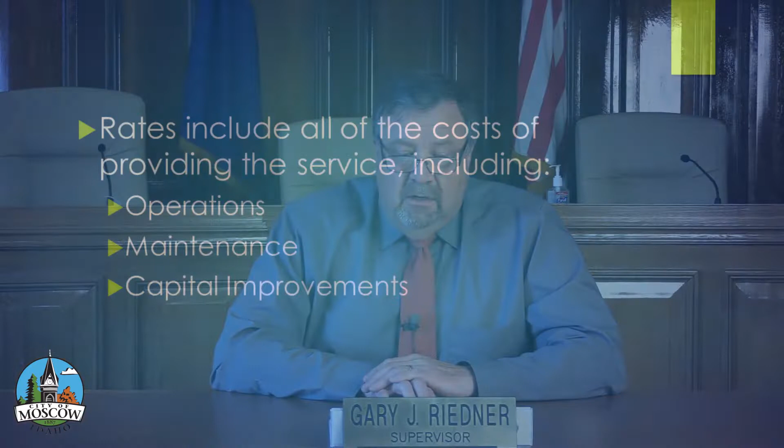Utility services are a little different because they aren't paid for with taxes, they're paid for with rates. So if you're a customer of the utility, you get water service, sewer service, garbage service, you pay a fee for that just as you would to a private vendor. Our Idaho code dictates that rates for these utilities must be equivalent to the value of services that are provided to the public or the customers. And rates include all of the costs of providing the service, including operations, maintenance, and capital improvements, or in other words, capital costs.

Typically, rates are broken down into two components. Base rates, which are rates which are identical to other customers in the same class, that is to say residential versus business, which may further be broken down for businesses determined by the type of business that is the customer. And then the second component of rates is what we call consumption. Consumption is calculated on the actual use of the commodity or the service by the individual customer. Balance of the two rates helps us to have a healthy mix of consistent funds for operations of the utility, while also allocating costs as much as practicable to those customers who are using more of the system.

Rate studies serve several purposes. First, they require that rates be revisited every 5 to 6 years in order to make sure that they are fair and equitable, including revisiting those customer classifications which I just spoke about. Secondly, they act as a check on the system to determine that operations and capital plans are up to date and funded appropriately. And lastly, they allow citizens to participate in the rate setting process.

The current rate study has been underway for many months, and during that time there have been updates to operations and capital plans, but there have also been questions regarding customer classifications, particularly in the areas of restaurant base rates and mixed uses, or separate types of businesses, typically in older buildings which are served by the same water meter, and how those mixed use rates are structured.

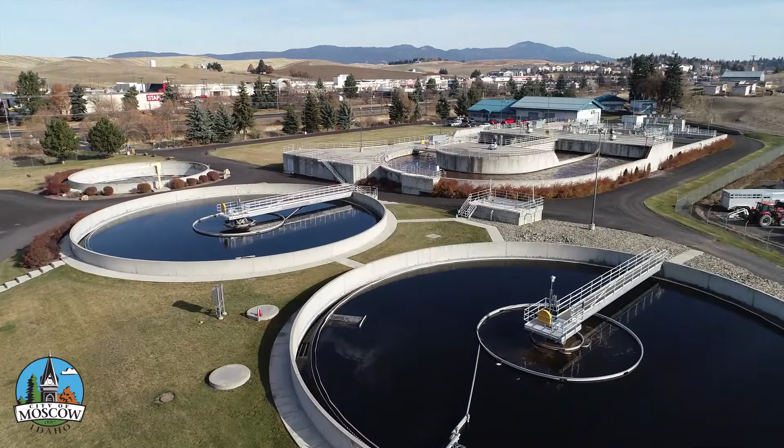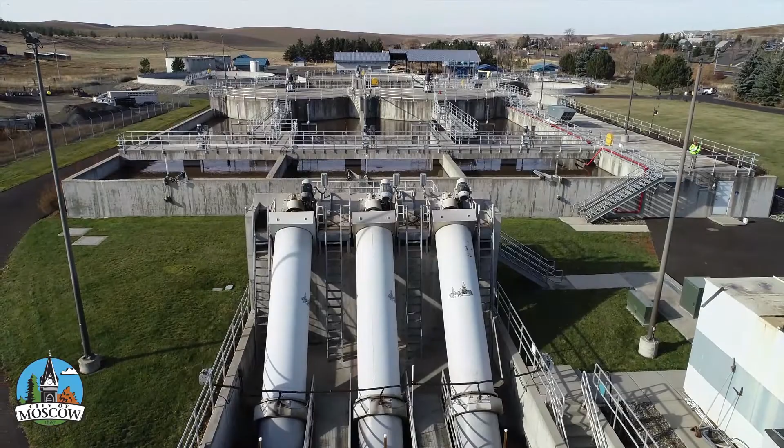Thank you. Hello, my name is Evan Timar, and I am the Water Reclamation Public Utility Manager. I would like to take this time to tell you about the City of Moscow Water Reclamation and Reuse Facility, better known as the WRF, our sanitary sewer conveyance system that carries the sewage into the reclamation facility, and our sewer utility budget. The Water Reclamation and Reuse Facility was originally constructed in 1918, and it consisted of 2 large septic tanks with contact beds for secondary treatment, and it has evolved dramatically over the years. 102 years later, it is now the most complex and costly facility owned by the city.

We are a state-of-the-art biological nutrient removal facility with advanced tertiary phosphorus filtration that can remove all of our major contaminants associated with our National Pollutant Discharge Elimination System permit. Moscow's current BNR facility was constructed in 2002. It uses beneficial bacteria to remove nutrients like nitrogen and phosphorus from the water before it is discharged into Paradise Creek.

If not removed, these harmful nutrients in our effluent can cause a harmful imbalance in the creek, causing it to become overly enriched with minerals and nutrients. Chronic symptoms of overenrichment include low dissolved oxygen, excessive algae growth, fish kills, murky water, and depletion of desirable vegetation.

Water quality regulations have evolved rapidly, and so has our facility. With the addition of our advanced tertiary phosphorus filtration system in 2010, our facility has not only met, but it has exceeded the removal requirements of these harmful nutrients. However, to ensure compliance with all of our NPDES-related parameters, the City of Moscow will be required to reduce the temperature of our effluent during the warm weather months.

Our permit contains a limit on what effluent temperatures we can discharge into Paradise Creek. This requirement in our permit will necessitate a significant engineering solution in order for us to assure compliance. As we look into the future needs of the utility, it is important that we plan for and fund these activities in order to protect the environment and stay in compliance with our NPDES permit.

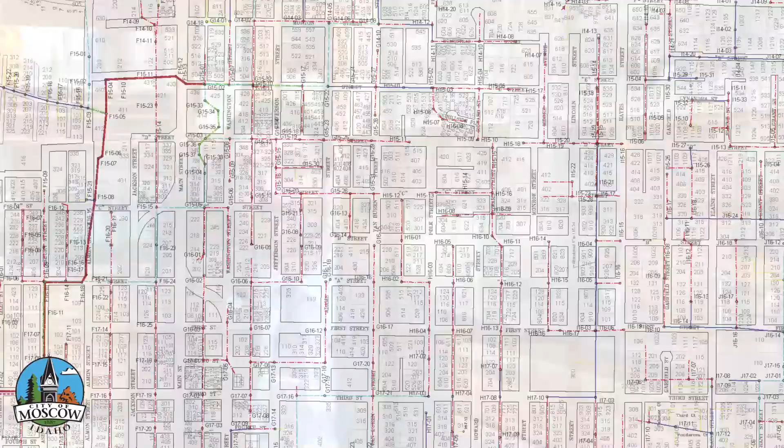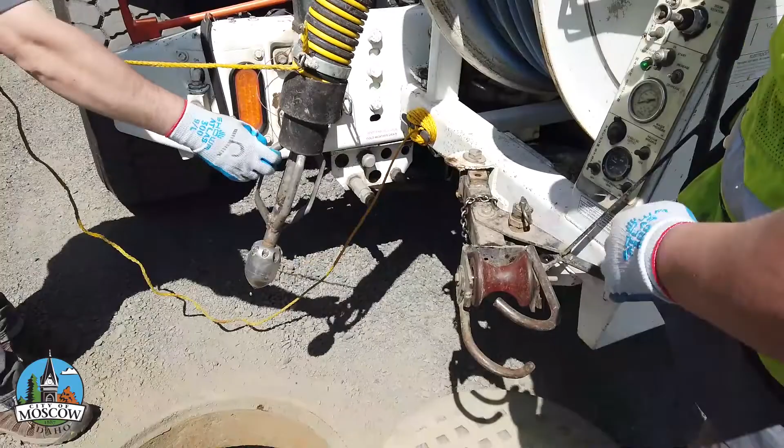Let's talk about another vitally important component of the city's sewer utility. That would be the conveyance system. The conveyance system is a network of about 85 miles of pipe, ranging in sizes from 4 inches all the way up to 36 inches in diameter. It also includes 4 sewer lift stations that pump the water from low points to higher points in their associated force main lines. The maintenance and operations of a conveyance system requires very specialized equipment to provide internal inspection and cleaning of the pipes and manholes.

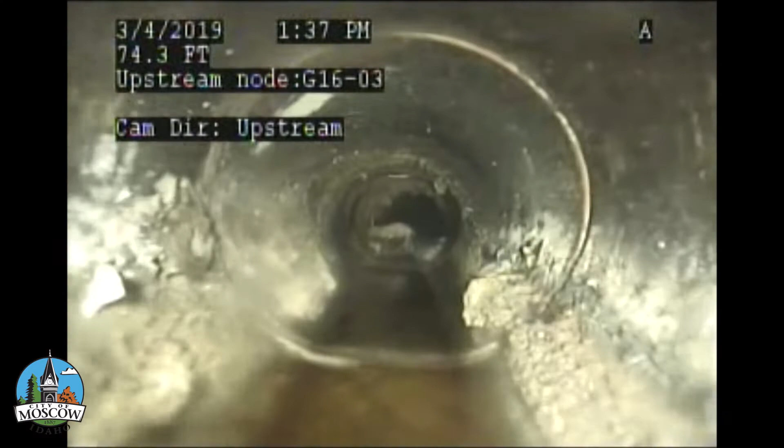Sewage discharged into the conveyance system can differ greatly between classes of users. For example, restaurants discharge sewage that puts a greater demand for treatment on the system because of higher amounts of fats, oils, and grease, also known as FOG, and higher total suspended solids concentration, which lead to a higher biochemical oxygen demand. The problem occurs when oil and grease liquefy at the higher water temperatures used to wash dishes, but then later cool and solidify in the sewer lines. Higher concentrations of FOG require increased cleaning and treatment, and therefore higher maintenance costs to the system.

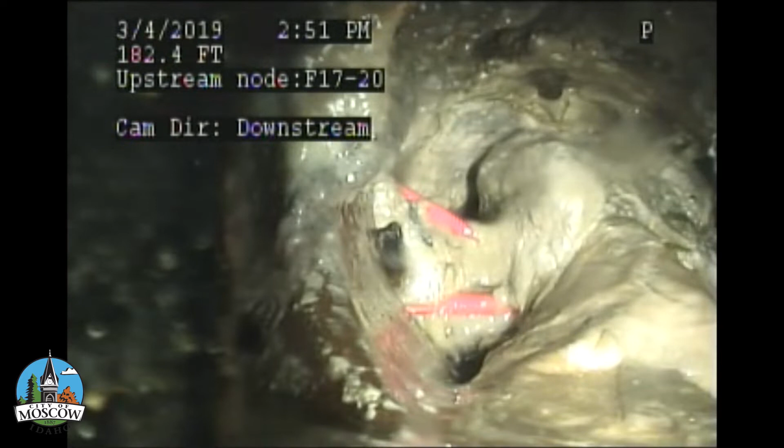When determining the cost to operate the sewer utility, we have to consider cost of routine maintenance and operations, things such as pipe cleaning, root abatement, video inspections, wastewater treatment, as well as laboratory analysis. These make up what we call our operations budget. We also have a depreciation plan so that we can anticipate the useful life of the facilities and equipment and replace them before they fail.

Funds for expansion and large replacement projects are put in what we call the capital budget. Our capital budget receives a portion of the rate revenues, and over time this account will have sufficient funding for constructing new sewer infrastructure, such as a system at the facility to achieve temperature compliance, as well as funding the sanitary sewer main replacement program.

The City of Moscow is working hard, investing and planning ahead to improve and maintain our infrastructure for future generations. Utility rate studies are the mechanism through which we ensure that we are providing the most efficient, economical, and sustainable wastewater treatment system for our community, and that we are fairly assessing our customers the cost to provide that system.

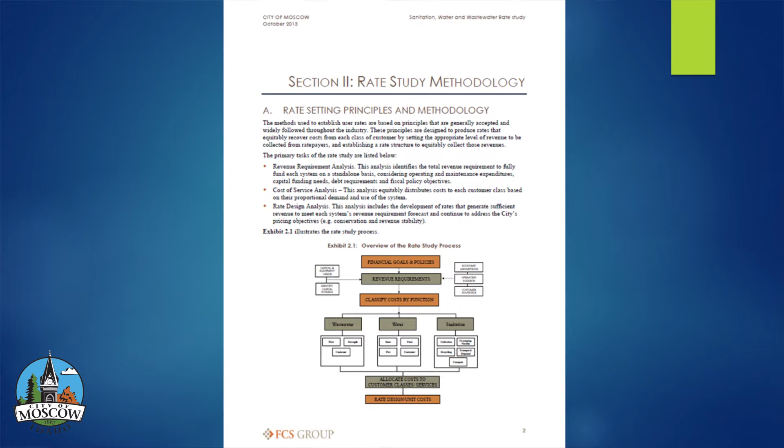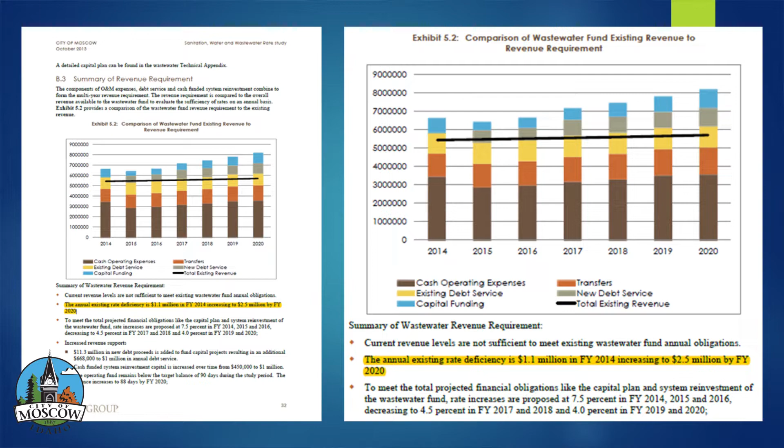The current sewer rates in Moscow are based on recommendations from the second comprehensive utility rate study completed and adopted in 2013. At that time, individual sewer rate classes were evaluated to determine if they generated sufficient revenue to cover the cost of operating, maintaining, and repair and replacement of the city's wastewater systems. The 2013 study revealed an existing annual rate deficiency of $1.1 million in 2014, increasing to $2.5 million by 2020. Rate adjustments were recommended and approved by the Moscow City Council at that time to cover this shortfall.

There are 8 different commercial sewer rate classes in Moscow. The 2013 study found that for several classes, including restaurants, revenue was not meeting cost of service requirements. Restaurants are significant because with very little industrial and manufacturing activity in the city, restaurants and other food service establishments are among the most significant contributors of commercial pollutant loading in the conveyance system and at the water reclamation and reuse facility. The difference in cost of service comes from the higher levels of total suspended solids, or TSS, and biochemical oxygen demand, or BOD, found in wastewater generated by restaurants.

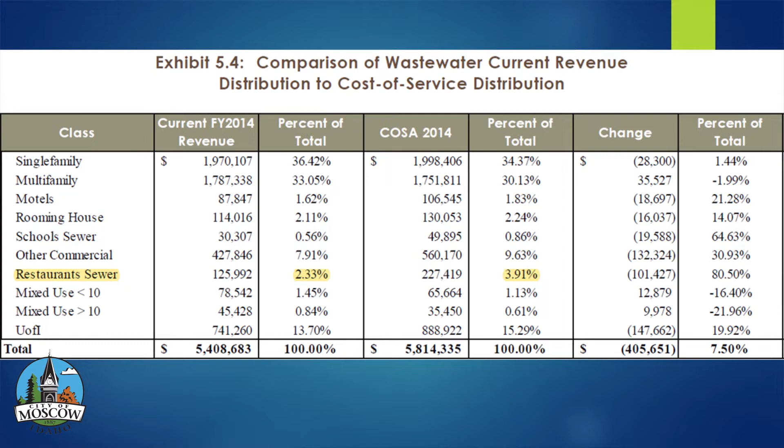In fiscal year 2014, the total cost of service to restaurants was calculated at 3.9% of total, while revenue from the restaurant class only covered 2.33%. Sewer bills are comprised of two components, the base rate and the consumption rate. The base rate is a fixed monthly charge that is applied to each class to ensure a stable revenue source, so that the basic functions of the wastewater division are able to operate on a regular and sustainable level.

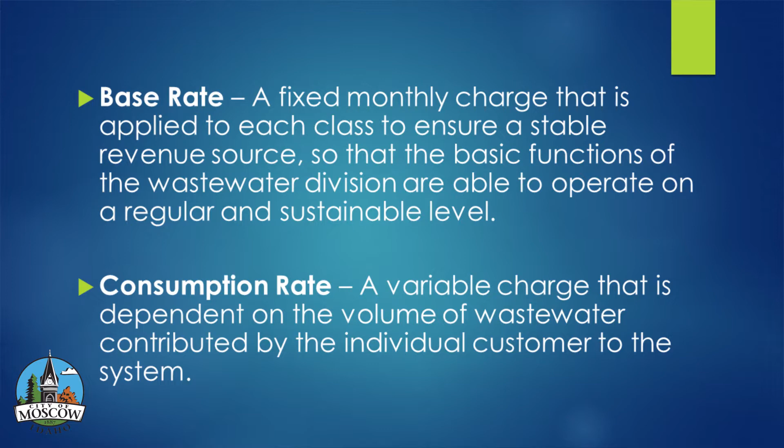The consumption component is calculated based on the volume of wastewater contributed by the individual customer to the system. Each base and consumption rate vary based on the calculated loading or pollutant levels of each class. The two rates combined must meet all of the current cost of service needs plus future funding requirements. The 2013 rate study approved by the City Council provided a funding plan designed to close the funding gap through fiscal year 2020. For the restaurant class, this meant that both the base and consumption rates were increased by 39.3% in fiscal years 2014 and 15, then at an annual rate applied uniformly to all classes.

The base rate for fiscal year 2020 is $309.92 per month, and consumption is $6.96 per 100 cubic feet, both of which align closely with the projected rates. The adjustments adopted in the 2013 rate study have successfully brought revenues in line with the needs of the system. Beginning in early 2019, staff began evaluating options for a simplification of Moscow's multi-tiered structure. We gathered information from a number of regional utilities and worked with FCS Group, the city's consultant for the 2020 rate study, to identify alternate rate structures that could still meet the needs of Moscow's system while adding mechanisms to further assure an equitable disbursement of the cost among the users of the system.

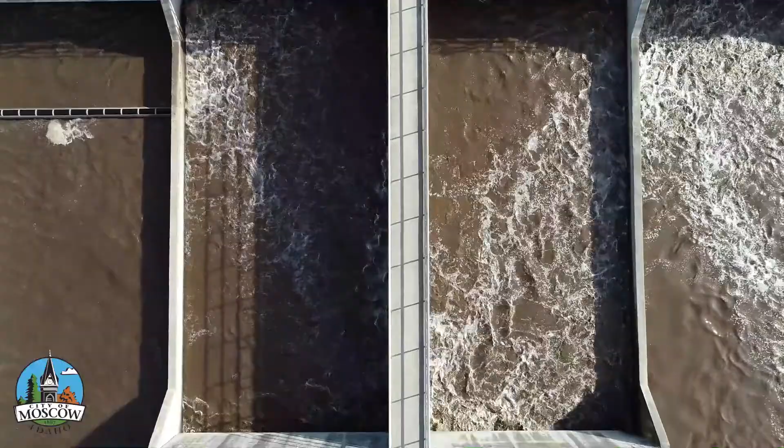Apples-to-apples comparisons between communities can be very difficult, as each municipality has unique requirements specified by their individual U.S. Environmental Protection Agency issued National Pollutant Discharge Elimination System, or NPDES, permit. Moscow discharges much of its treated effluent to Paradise Creek, which is classified as impaired for E. coli, temperature, and phosphorus by the EPA and the Idaho Department of Environmental Quality. In order to comply with the permit requirements and to legally discharge to the creek, Moscow's Water Reclamation and Reuse Facility is a state-of-the-art operation which uses biological nutrient removal and advanced tertiary phosphorus filtration. These kinds of treatment processes may not be necessary in other municipalities, leading to significant disparities in cost of service.

Rate studies are routinely conducted to help ensure that the utility is meeting evolving demands and distributing the cost in an equitable manner across all customer classes. With the 2020 rate study, staff is recommending a fairly comprehensive update to the commercial rate structure utilized by the city. The goal is to strike a balance between revenue stability and equity. The first of these recommendations would be to restructure the commercial rate classifications from the current 8-tier system down to a 3-tier system: commercial low, commercial medium, and commercial high. This change is designed to simplify processes at all levels for the customers, developers, inspection staff, and utility billing.

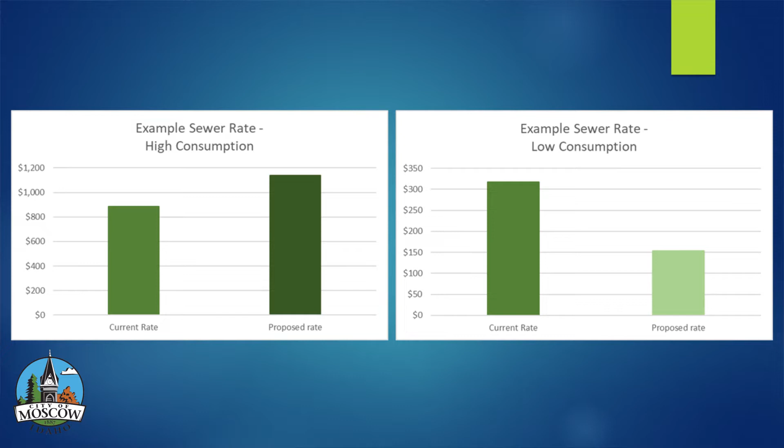The different types of uses are being evaluated to determine the level of wastewater loading generated by each use in order to determine the appropriate classification. This will help ensure that similar contributors are charged accordingly. This new classification system also shifts the rate structure to focus more heavily on consumption charges than on base rates. This shift will help assure that those who create less system demand see a commensurately lower rate. This will be particularly impactful in the commercial high class. It will result in lower monthly sewer bills for those with lower consumption and will better reflect a customer's actual loading on the system.

Finally, we are examining the most effective way to assess and charge mixed-use customers. In order to further the goals of simplification, all future mixed-use accounts would be charged at the highest use rate for all consumption. This is designed to encourage metering of individual spaces, especially if there is a variation between classes in a single building.

Some existing buildings with multiple commercial uses connected to a single meter may be extremely difficult to modify. For those existing customers, a weighted model will be used to estimate the contribution of each user class. Potential incentives for those who want to meter each use accurately may include allowing remote read meters to be installed inside the building and waiving general facilities charges for a specified period of time.

Modifying sewer billing rates can have significant impacts on both the business community and the city's sewer department. Many establishments on the low end of water consumption will see significant financial relief, while those that contribute more to the system will bear a more proportionate amount of the cost of delivering the service.

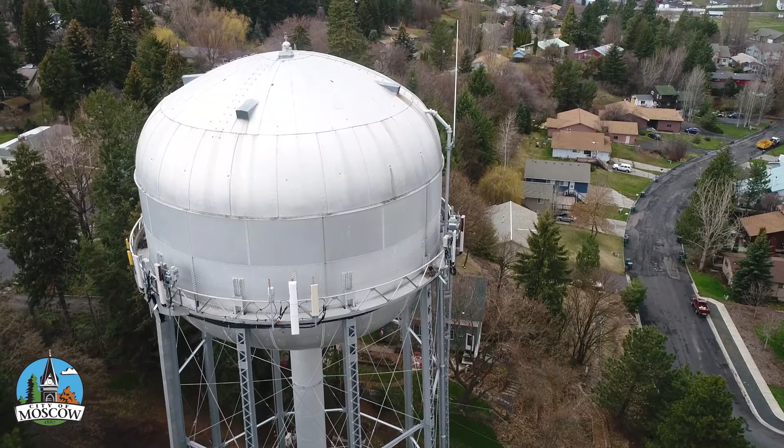The first drinking water well and components of Moscow's distribution system were developed in the late 1800s. Since those early days, Moscow has made a considerable investment in a modern, efficient public water system. As you may suspect, there are a number of regulations and oversight in the operation of a public water system. We work closely with the Idaho Department of Environmental Quality to assure that we are always in compliance with the Idaho rules for public drinking water systems.

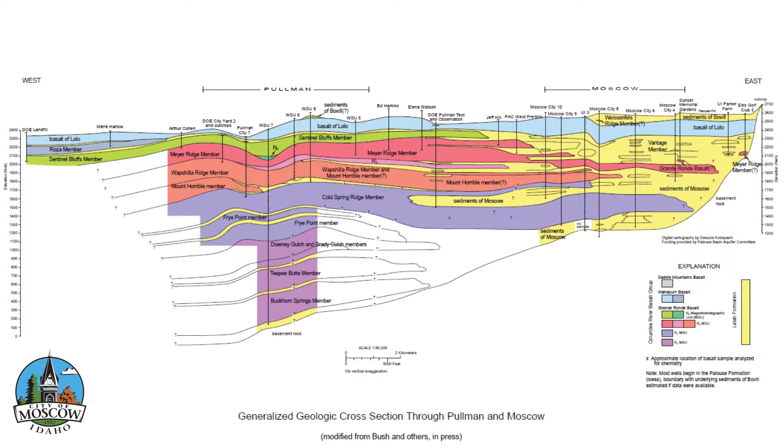Moscow draws its water from an aquifer system known as the Palouse Basin. Water production currently consists of the operation of 5 groundwater wells which draw water from 2 distinct underground aquifers, the shallow aquifer known as the Wanapum and a deeper aquifer called the Grande Ronde. We have 2 wells that draw water from the Wanapum system and 3 others that draw water from the Grande Ronde system, with a 4th well expected to come online in late 2020.

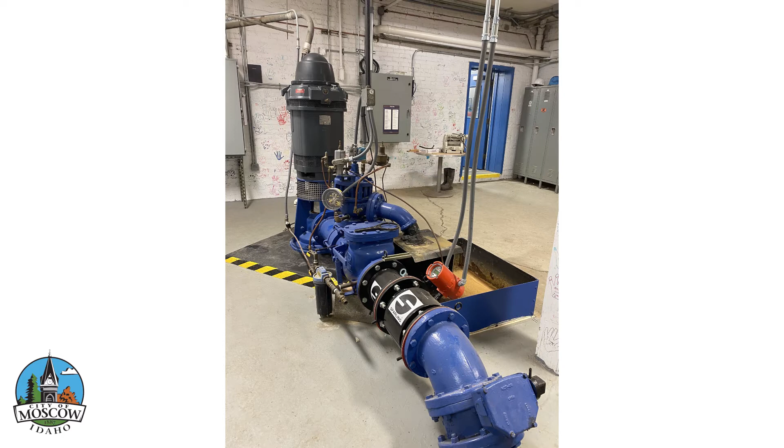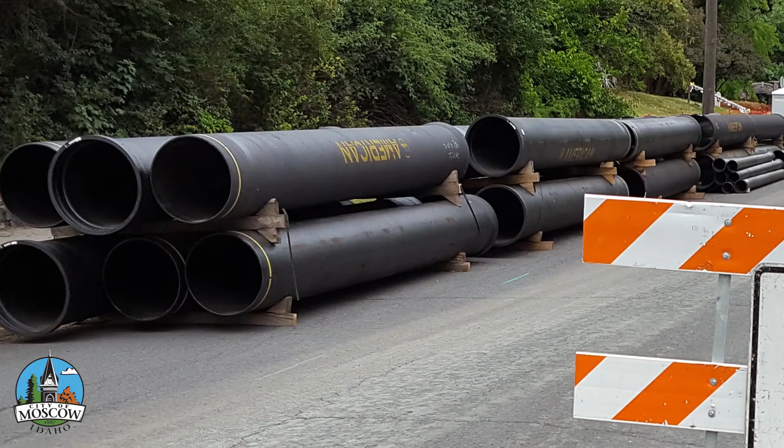To protect these water sources, the city has implemented best management practices designed to protect the wells and the areas that surround them. Our drinking water distribution system is a network of approximately 100 miles of pipe ranging in size from 1-inch service lines all the way up to 24-inch water mains. We operate 6 booster pump stations that increase pressure or maintain pressure along with meeting fire flow.

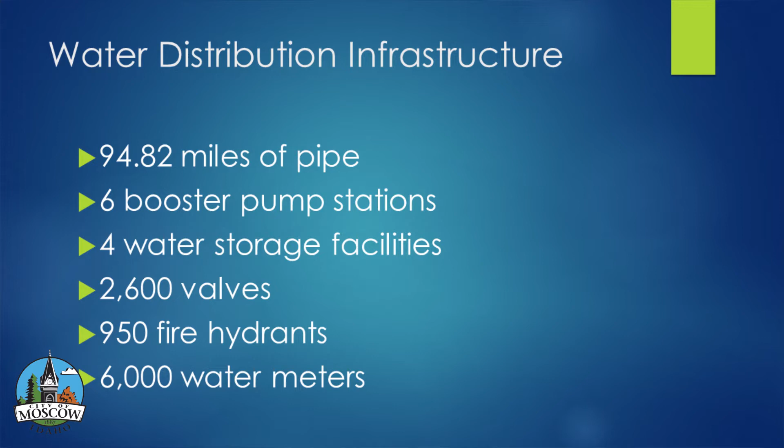We have 4 finished water storage facilities with a total capacity of 4.7 million gallons that help us meet system demands, including fire flow. We also maintain and operate over 2,600 valves, 950 fire hydrants, and read and service over 6,000 water meters. The maintenance and operation of the production and distribution systems require state-certified, highly trained operators and a lot of specialized equipment.

Conservation in Moscow is very important. As discussed earlier, we rely entirely on 2 aquifers for our water supply, the Wanapum, the upper aquifer, and the Grande Ronde, the lower aquifer. This aquifer system is also the sole source of water for the University of Idaho, the City of Pullman, Washington State University, and other surrounding users.

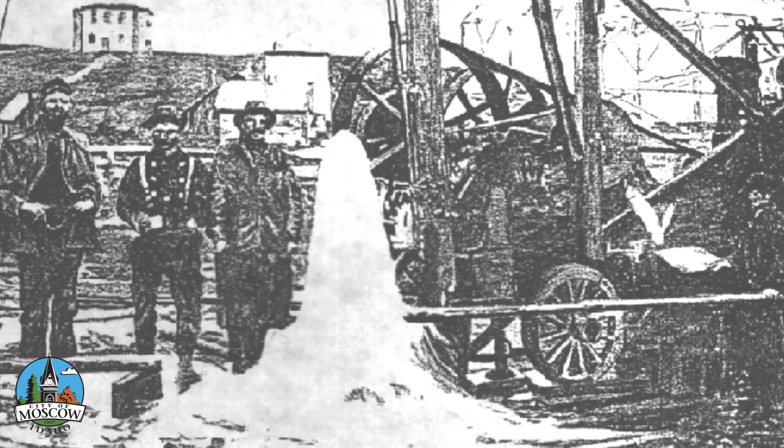These aquifers have steadily declined since they were first tapped in the late 1800s. This makes conservation absolutely imperative. As responsible stewards of our natural resources, it is very important that we all strive to conserve as much water as possible. To this end, the City of Moscow has a progressive conservation program offering rebates, free water-saving devices, and resources along with information. We have also developed a program to provide education to our schools regarding the importance of water conservation.

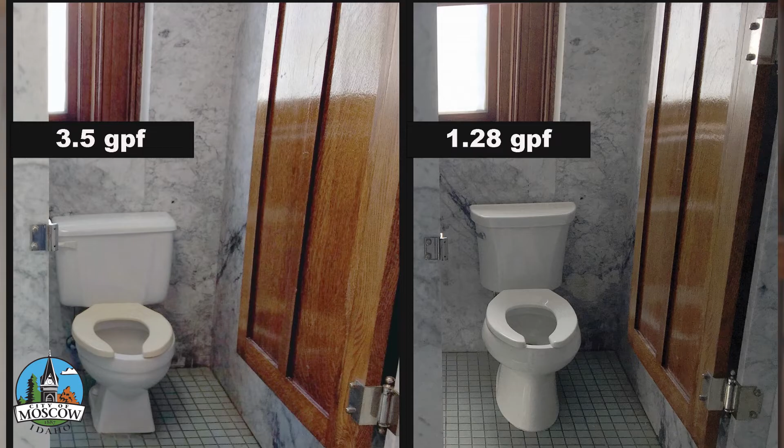In 2016, the City Council adopted the Water Conservation Program Plan, which includes rebates to provide incentives for customers to retrofit to low-volume toilet fixtures, as well as a program which rewards customers for converting an irrigated lawn to a xeriscape or a low water use landscape.

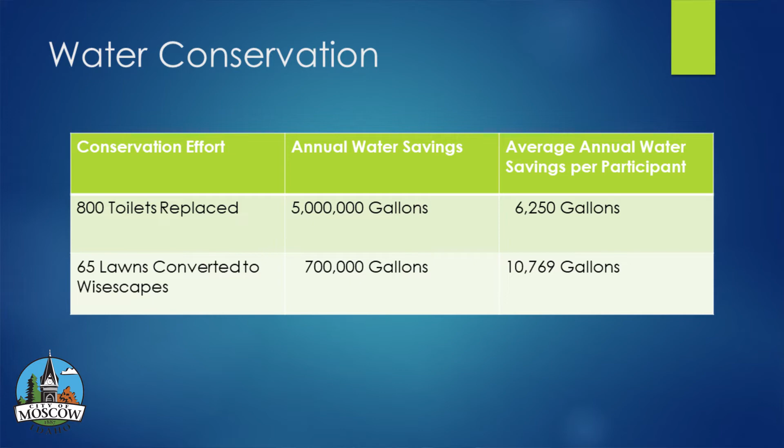Since 2016, approximately 800 toilets have been replaced, which has resulted in an annual water savings of approximately 5 million gallons per year. During that time, approximately 65 households have taken advantage of the Lawn to Wisescape incentive, which has resulted in approximately 90,000 square feet of turf removal and approximately 700,000 gallons of water savings annually.

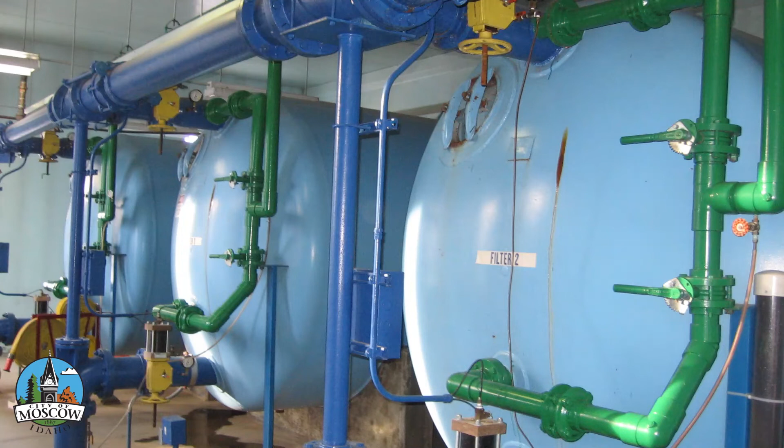The Water Department has been making operational changes to drinking water production and distribution over the last several years in order to lower system pressures and flow, which decreases water main leaks, maintains aesthetic water quality, reduces the need for filter backwash, and minimizes water main flushing. In order to maintain water quality, it is necessary for maintenance crews to reverse water flow through the system filter media in order to flush out contaminants, a process called backwashing.

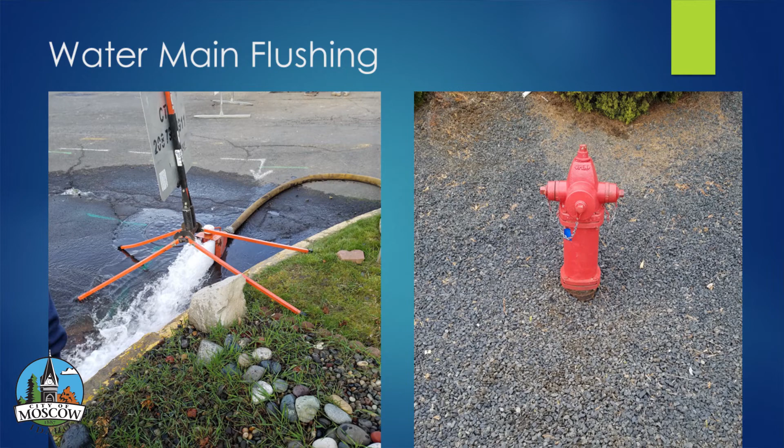In 2019, the department reduced filter backwashing by approximately 5 million gallons, or the equivalent of the toilet program water savings to date. By controlling system pressure and flow while maintaining water quality, the city has reduced annual water flushing by approximately 15 million gallons annually. Combined with reduced backwash needs, the department saved 20 million gallons in 2019. Not only is this a significant amount of water savings, it reduces the impact on well pumps and the distribution system.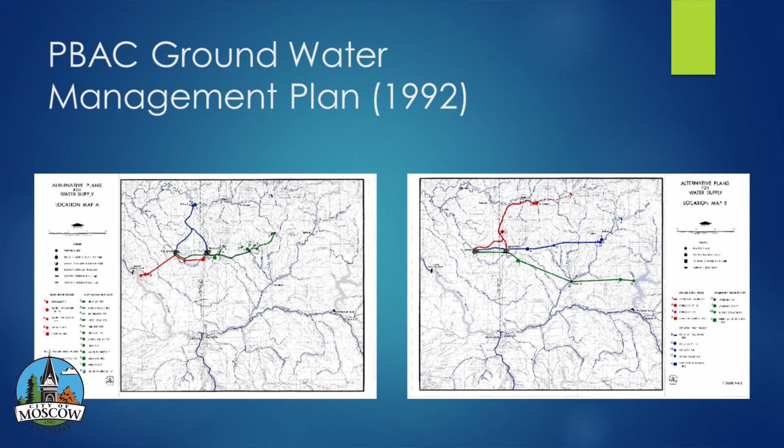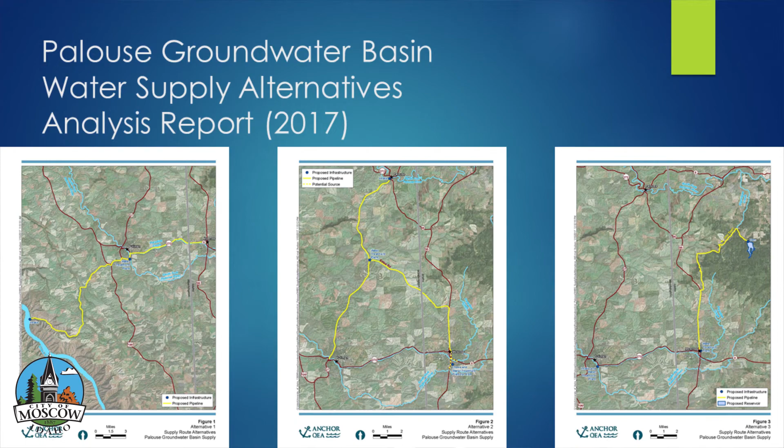In 1992, PBAC proposed a groundwater management plan for the basin. The plan included voluntary pumping limitation targets as well as continued pumping and water level monitoring and research, which involves hydrogeologic characterization and alternative water supply options. In March 2017, the PBAC consultant team completed the Palouse Groundwater Basin Water Supply Alternatives Analysis Report, which identified the most promising water supply alternatives. PBAC continues to refine the alternatives toward a goal of selecting a viable alternative or a set of alternatives to help position PBAC's water supply project in the Idaho Department of Water Resources' future water project funding cycle.

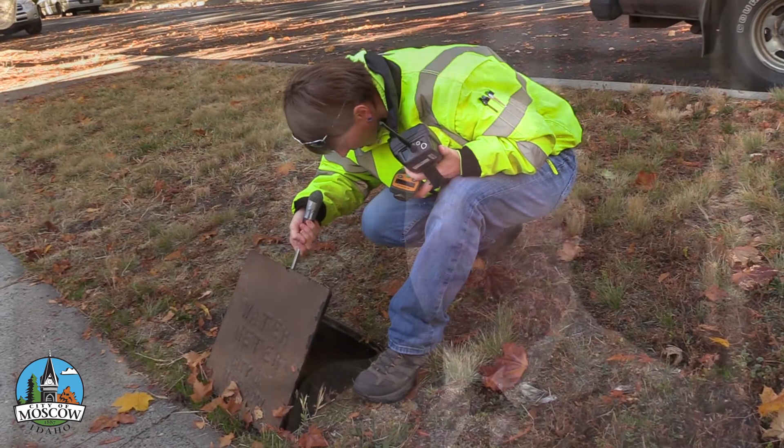When determining the cost to operate the water utility, we have to consider the cost of routine maintenance and operations, including pumps, hydrants, valves, pipes, meters, etc. This makes up the operation and maintenance, or O&M budget. We have also developed a depreciation plan as we plan for the systematic replacement of facilities and equipment. Funds for expansion and large replacement projects are put in what is called the capital budget.

Our capital budget receives a portion of the rate revenues, and over time this account will have sufficient funding for constructing new water infrastructure, such as the completion of well number 10 and 2 new booster pump stations. The City of Moscow is working hard by investing in our water system and planning ahead to improve and maintain our infrastructure for future generations.

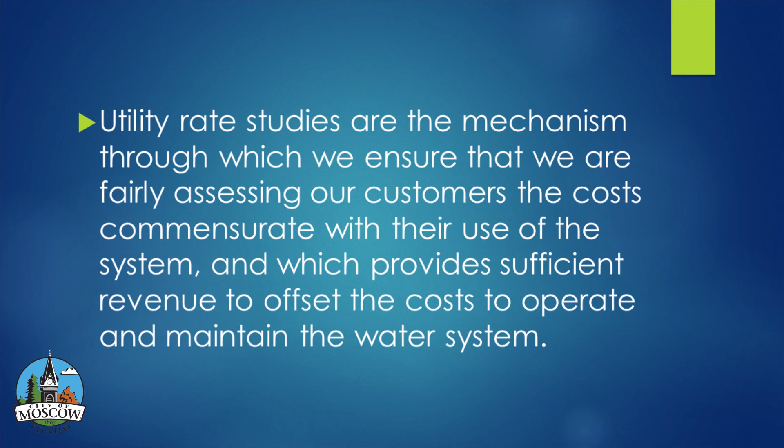Utility rate studies are the mechanism through which we ensure that we are fairly assessing our customers the cost commensurate with their use of the system, and which provides sufficient revenue to offset the cost to operate and maintain the water system. These costs include operation, maintenance, capital improvements, and billing and collection procedures. The proposed rate structure must be designed to provide the financial resources to meet these system needs in a fair and equitable manner.